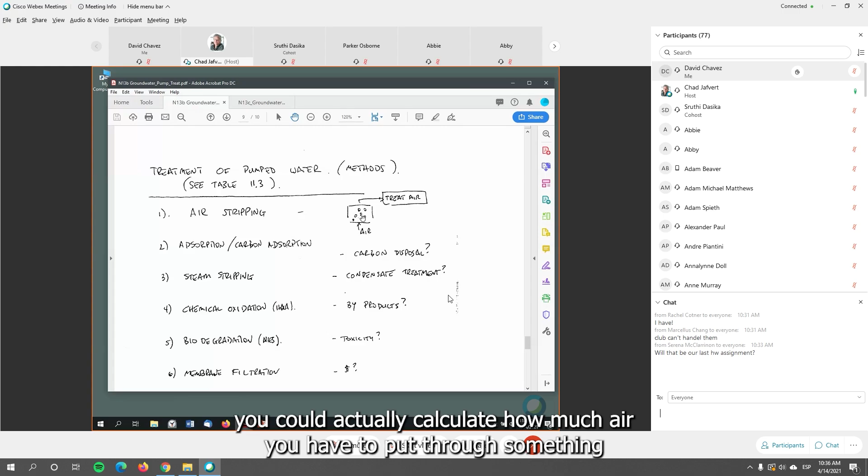So air stripping is one way. We've talked about Henry's law, so you know - if I'm putting air through water, those air bubbles are saturated with the chemical in the water by the time the bubble gets to the top and breaks. You could calculate how much air you have to put through to basically strip out all the contaminants, assuming equilibrium partitioning to the gas bubble by the time it reaches the surface. The finer the gas bubble, the more distribution to the bubble, or the more saturated the bubble will be, because it's a surface area to volume phenomena.

So air stripping, you can actually air strip in the vadose zone. Oftentimes I think down here we have something - well, no, I don't.

You can put a sparging tube down in the unsaturated zone and basically blow the contaminants out, then capture them as they're coming out of the surface. Capturing them as they're coming out is problematic, but you can also pump the other way, pumping it out through the pipe and treating it at the end of the pipe.

Adsorption, carbon adsorption. There are actually a lot of places that do this. They use activated carbon as an adsorbent. Activated carbon has a high surface area. Chemicals adsorb to it, and you usually model it with a simple Freundlich isotherm.

If you've got a water plume contaminated with some contaminants and you don't have a whole lot of other organic matter in the water, you can adsorb those contaminants, and then you have to deal with the activated carbon disposal. You can take it to an incinerator and burn it, or you could potentially wash off the carbon and reuse it.

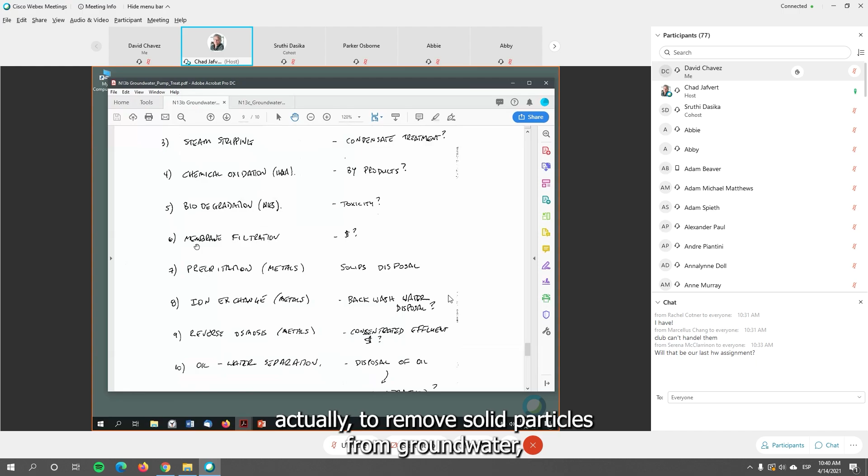Membrane filtration. This is often used to remove solid particles from groundwater, because even in the subsurface you've got lots of fine particles, and those fine particles, colloids, have a lot of contaminants on them.

So before you dispose of the water, which could be low in contamination, you remove the fine particles by membrane filtration, and it basically cuts down on the amount of contamination that's in the water. Then you may be able to discharge the water to the sanitary sewer and have the city treat the rest of the water.

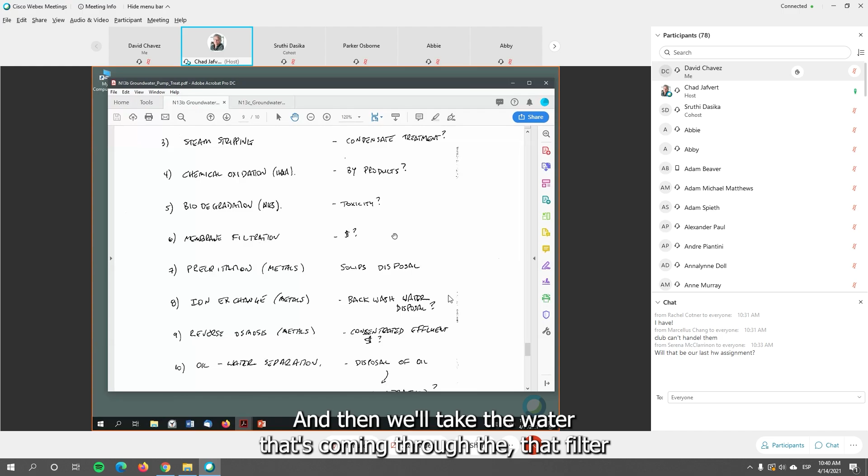Obviously you need a permit to do that, but you could. They may even say we don't want any particles, you have to remove the particles with a membrane filter, and then we'll take the water that's coming through that filter into the sanitary sewer.

Precipitation, sometimes you can do this with metals. Sometimes you can put in a cutoff wall that will precipitate heavy metals. So if you have a plume of contamination containing some metals like copper, cadmium, lead, or chromium, you may be able to put in a cutoff wall that contains a co-ion that can precipitate that out, or just absorb to it.

The common thing here is again putting in zero valent iron, because zero valent iron oxidizes slowly, and as it oxidizes, other metal species absorb to it.

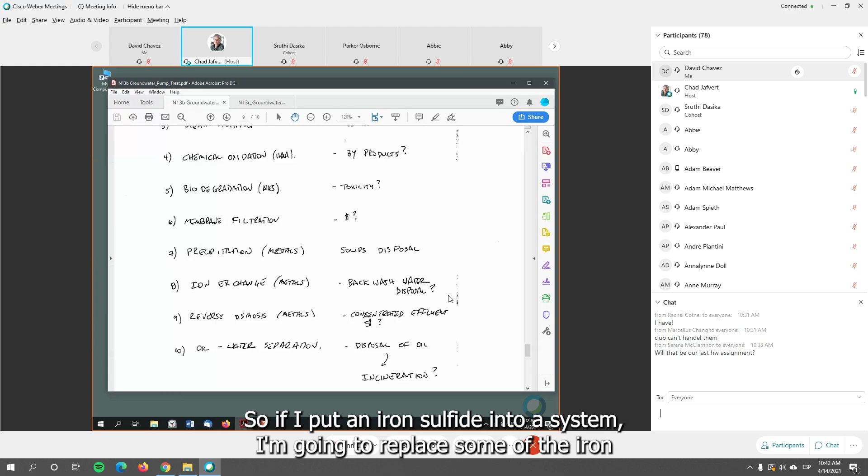Things like even sulfides, you can precipitate metals with sulfides now. Sulfides are very famous as ways of precipitating metals, because iron sulfide is not very soluble, but mercury sulfide and copper sulfide are even less soluble. So if I put iron sulfide into a system, I'm going to replace some of the iron with mercury, cadmium, copper, or other things, because they're less soluble than the iron.

Ion exchange, then you have water to dispose of. In 360, we do an ion exchange experiment where we put copper on an ion exchange resin and kick off the sodium ions. So you could do the same thing if you've got metals in a plume.

Maybe you've got chromium-3 in a plume. You could run it through an ion exchange resin, capture all of the chromium, exchange it with sodium, and then you have to deal with the backwash water, which is high in chromium. But then you may be able to precipitate that chromium out and reuse it, send it back to the factory where the chromium originated, and they can reprocess it.

Reverse osmosis is generally done to really clean up the water, so it's used in drinking water. It's rarely used in water contamination or groundwater contamination issues unless you're going to drink the water. Reverse osmosis removes the organics, it removes the metal species, it removes just about everything. The only thing it doesn't remove is the water.

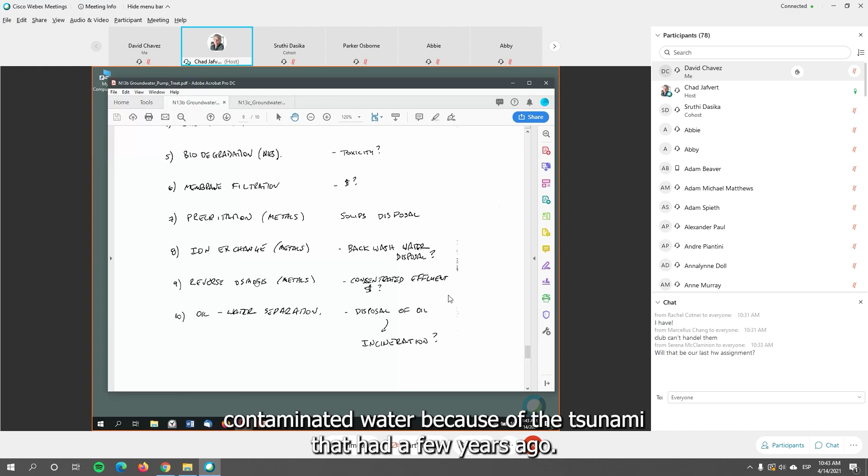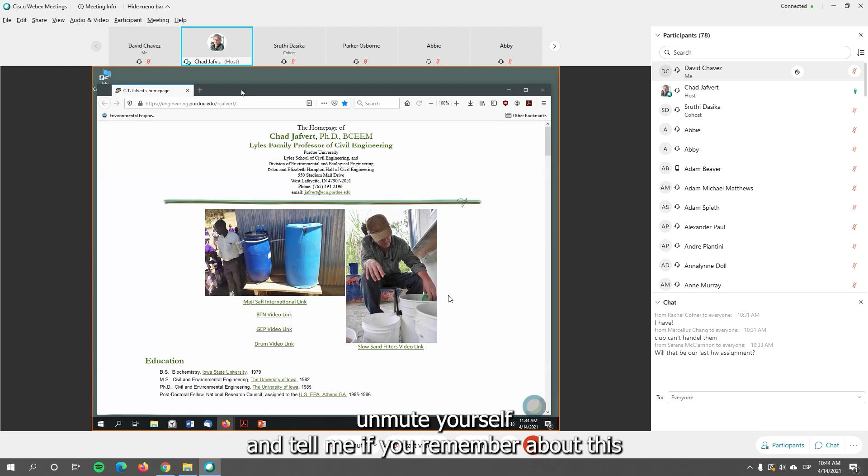On NPR today, they were talking about the nuclear reactor in Japan that has all of this contaminated water because of the tsunami that hit a few years ago. I don't know if you guys remember this. Unmute yourself and tell me if you remember about the tsunami.

I do. I can't spell tsunami.

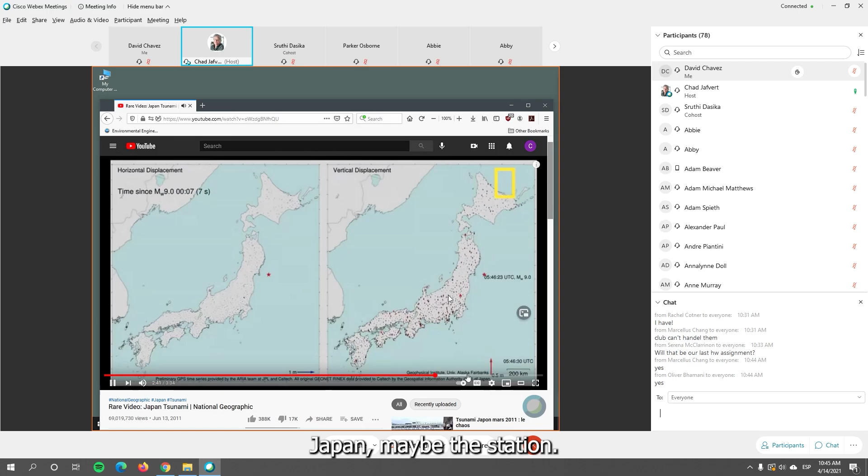Anyway, it knocked out a nuclear power plant that was right on the coast. And as a result, they have all of this contaminated water in tanks, and now they're dealing with it.

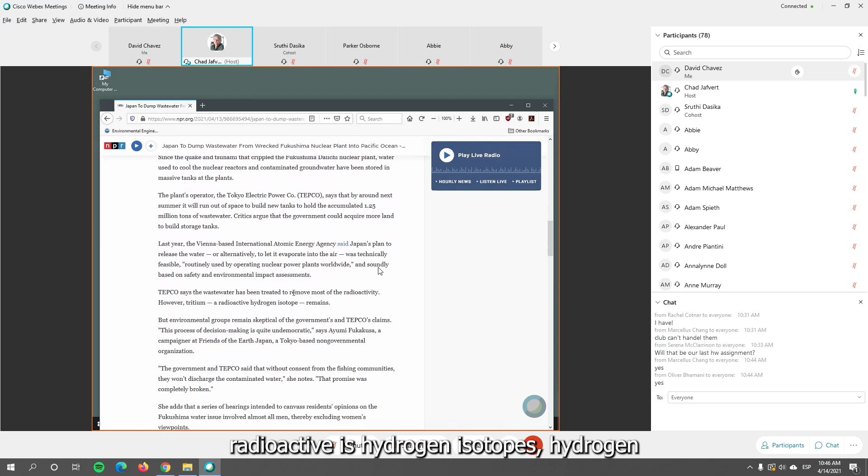Let me see if I can find it. Yep, this is it, NPR: Japan to dump wastewater from wrecked nuclear plant into the Pacific Ocean. There's a lot of protests going on about doing this, but they've treated the water apparently with something like reverse osmosis. They haven't said exactly, I don't think. But because a lot of the radioactive water is hydrogen isotopes, hydrogen is half part of water, H2O, and so if you get tritium contamination, obviously reverse osmosis isn't going to take out the tritium.

We've talked about two nuclear disasters. One isn't necessarily a disaster that happened immediately - it was something that happened over about a 40-year period in the state of Washington with the Hanford site and its contamination, which is hugely polluted. And then this nuclear treatment facility too, having to deal with water. So we're still not there on how we deal with energy.

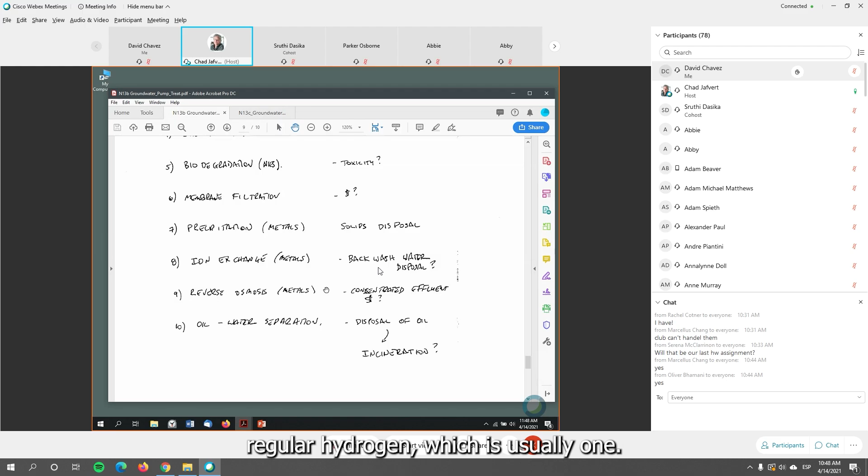But anyway, reverse osmosis can be used, and in that case, I think that's what they did use to remove the uranium and other things. But the problem still is the heavy water still gets through because it's moving through with the water, obviously. So they basically concentrated the really bad nuclear isotopes, but not the tritium. Tritium is basically a hydrogen atom with two additional neutrons in the nucleus, so it's got an atomic mass of 3 rather than regular hydrogen, which is usually 1.

And there is some - let me look up one other thing.

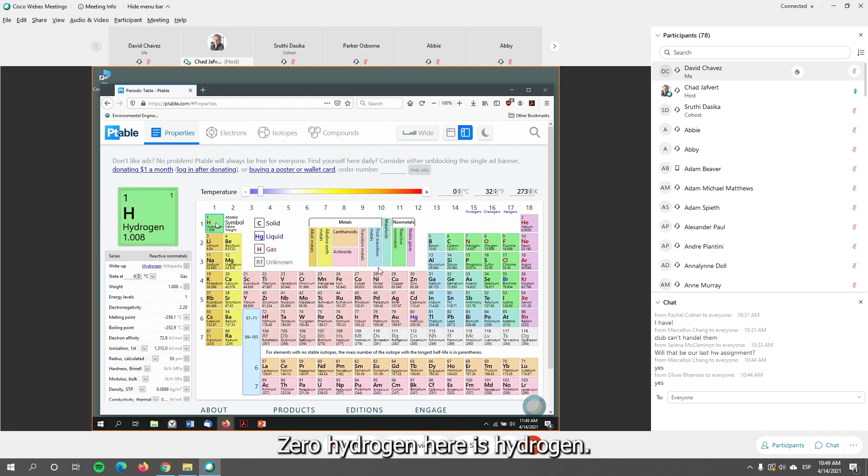I know I'm getting off track here. Hydrogen has an atomic mass of 1.008. Chlorine has an atomic mass of 35.45. Why is hydrogen not 1? Why is carbon 12.011? I thought they did carbon as 12. What's this 0.011?

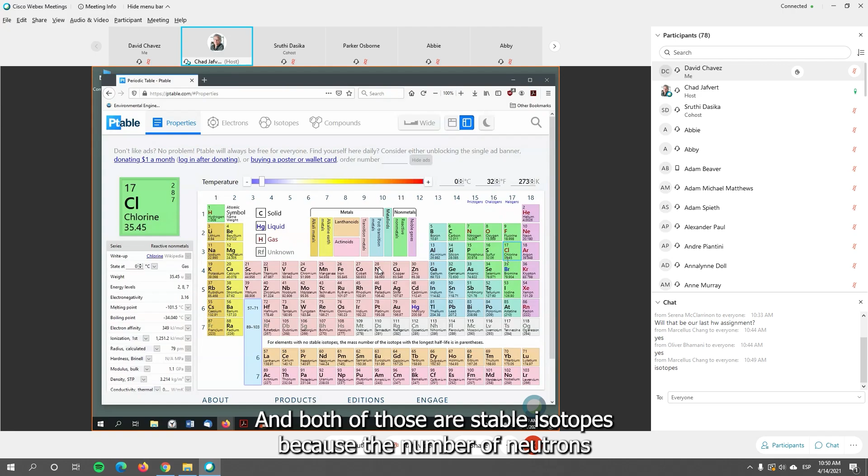It's interesting because chlorine is one of the few where it's almost halfway in between. There are 2 common isotopes of chlorine, one is 35, and I think the other is not 36, it's actually 37. Both of those are stable isotopes because of the number of neutrons in the nucleus.

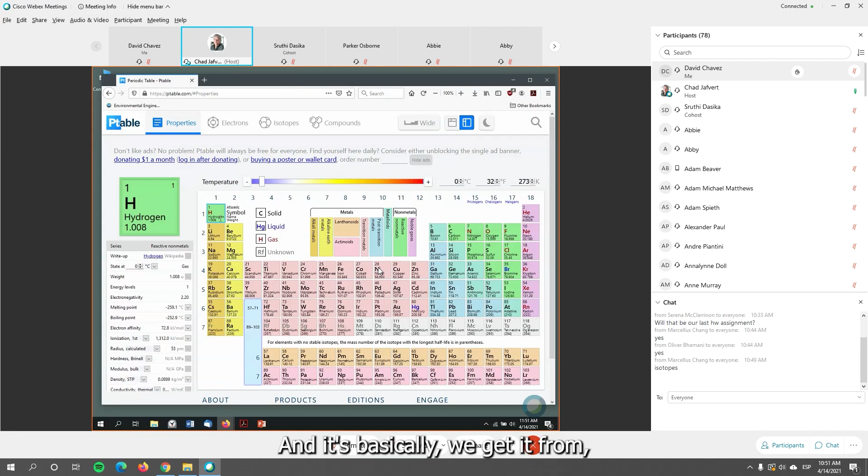So over here, hydrogen, there's a little bit of deuterium, which has a proton and a neutron in the nucleus. But tritium is very, very rare, and we basically get it from bombarding things with other atoms, and it also forms from the decomposition of uranium and other heavy radionuclides. So it's obviously a problem in nuclear waste.

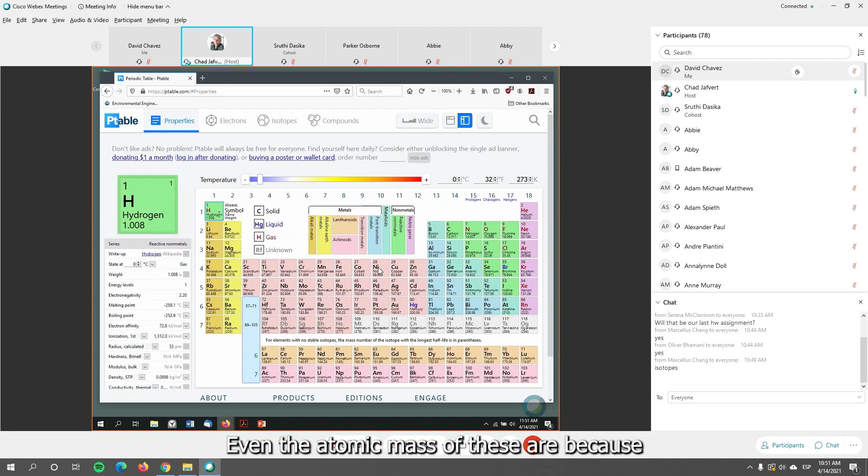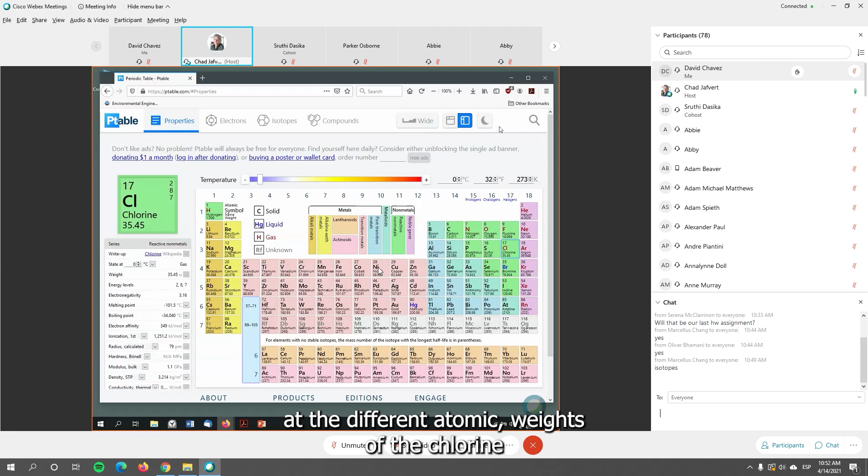So you get the idea, even the atomic mass of these elements is because of the different isotopes. But chlorine is the biggest problem. If any of you do mass spec analysis, chlorine containing compounds are really, really difficult to look at because of these different weights. A mass spec looks at the mass of the molecule, and if you have 2 or 3 chlorines, that means for the same compound you're going to have 5 or 6 peaks because they appear at the different atomic weights of the chlorine in the individual molecules. So mass spec is where you can really see that difference.

So ion exchange, reverse osmosis. We don't do a lab on reverse osmosis, but it's pretty straightforward. We've talked about it in this class, where you're basically pressurizing water, pushing it through a semi-porous membrane where the water goes through, but because of the properties of the membrane it does not allow ions to move through it.

So reverse osmosis is a good way of deionizing the water too. It also doesn't allow large macromolecules to go through, like humic acids, fulvic acids, so you remove all of the organic matter from the water. A few small organic molecules may get through, but not very many, like ethane or ethanol might come through. But it's mostly water, and the ions, just because the membrane is fairly hydrophobic, it doesn't allow ions to dissolve in the membrane like it does for water to dissolve in the membrane.

Then oil-water separation, this is one of the most common things, because if you have a groundwater that's contaminated with a non-aqueous phase liquid, a NAPL, it can be an L-NAPL or a D-NAPL, either a light non-aqueous phase liquid that floats on top of the water, or a D-NAPL, which sinks into the water and becomes very, very problematic. So oil can be heavy oil or light oil.

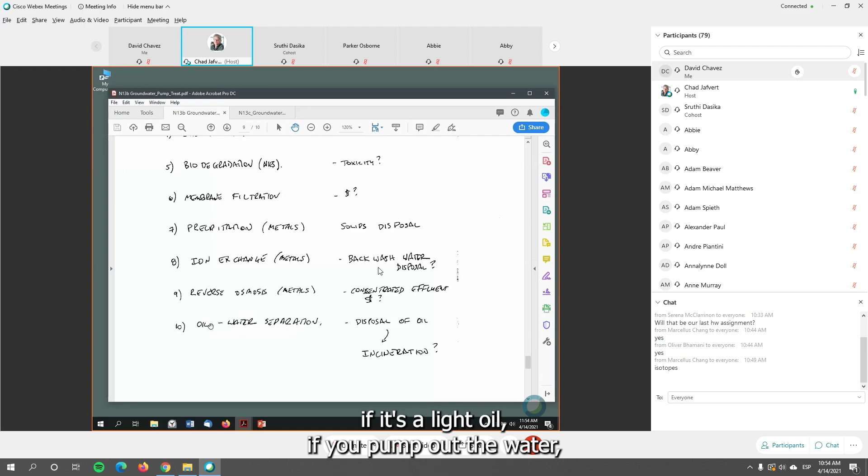But if it's a light oil, if you pump out the water, the first thing you do is put it in a big tank. The oil floats on top, and then you can skim that oil off and drain the tank from the bottom, and then with the permit, potentially dispose of that water through the sanitary sewer. That way you keep the oil, and then the oil may go to a hazardous waste landfill, or it may be incinerated, depending upon what kind of oil there is. So disposal of the oil is incineration or some other process.

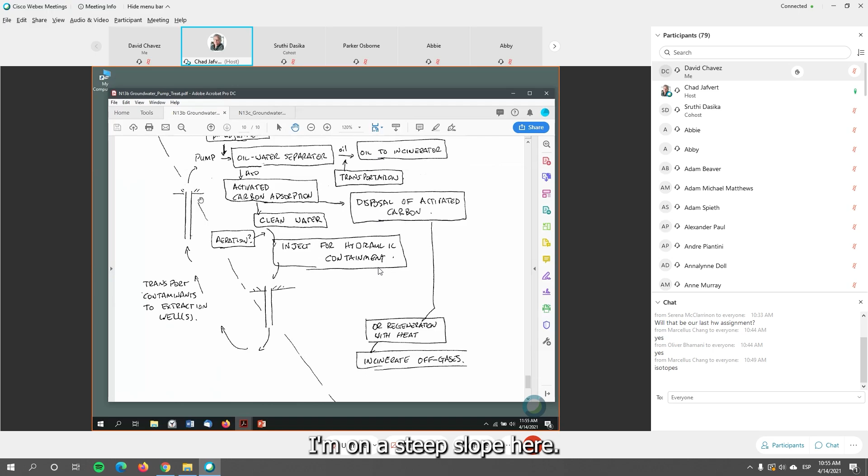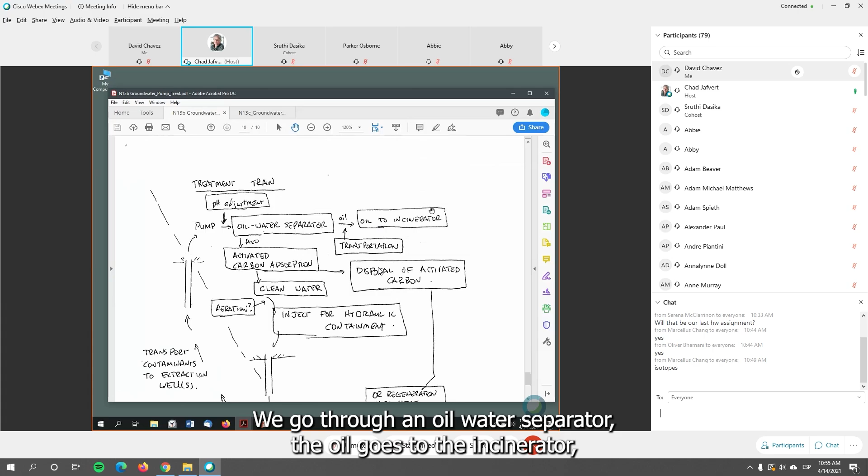So here's an example, transport of contaminants to extraction wells. This is below ground, this is above ground. I turned it sort of sideways so I'm on a steep slope here, but think of this as being a flat slope. We are pumping water out at this well, and then we may be doing pH adjustment. We go through an oil-water separator, the oil goes to the incinerator, and we have transportation costs to get it there.

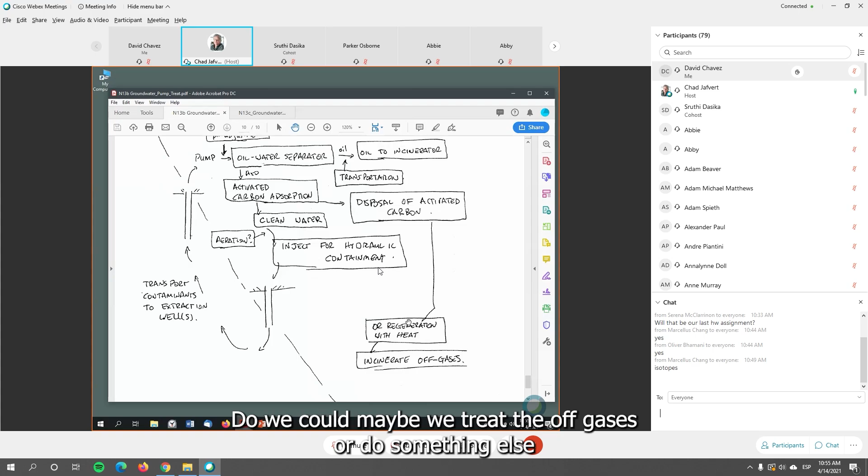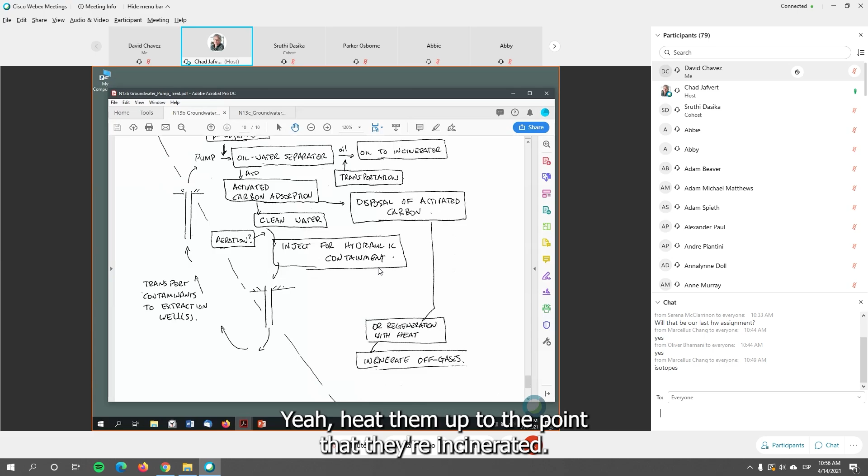The water then goes through an activated carbon adsorption unit to remove organics that are not removed by a separate phase process. Then we have fairly clean water, but the activated carbon we have to dispose of, or we can regenerate it with heat. So we could heat it up, and then the off gases we have to do something to, maybe we treat the off gases, or do something else to basically break down the organic chemicals, or even just heat them up to the point that they're incinerated, that they're basically all oxidized.

The clean water then we can re-inject for hydraulic containment. So we contain our plume of contaminants on site by re-injecting our clean water after we've cleaned it all up, and that pushes the contaminated water towards this pump, because we're increasing the groundwater table here and decreasing it here. We're adding water here and taking water away here, so the water flows from this point to this point.

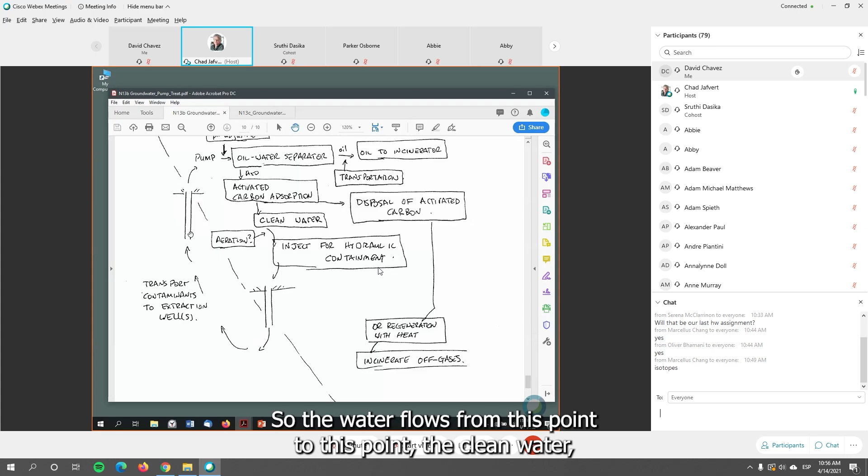The clean water could also go through aeration or other processes, but you get the idea. As environmental engineers, we deal with systems. We don't just pump the water - it's not just one system we're dealing with. We're always doing multiple things. Each of these is a separate process, and we're linking processes together in a treatment train.

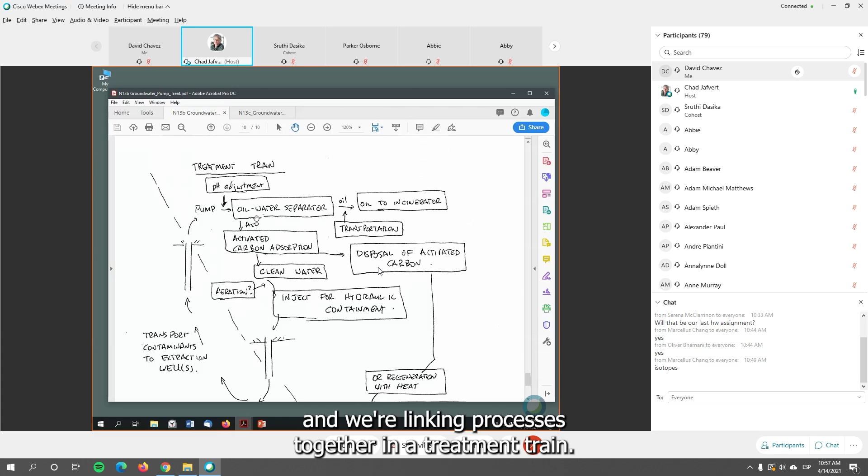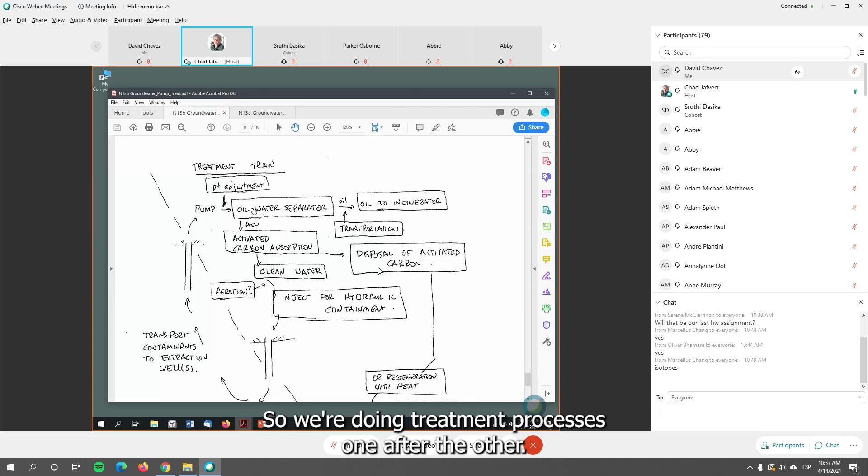So the water is first treated here to remove the major contamination. Then we're removing more contamination here. Then the clean water may be aerated again to induce some microorganisms before we re-inject it. We're doing treatment processes one after the other, and how we sequence these is very important. We don't want to send our water through carbon adsorption first, because then all the oil is going to get stuck to our carbon and we're going to have a real mess.

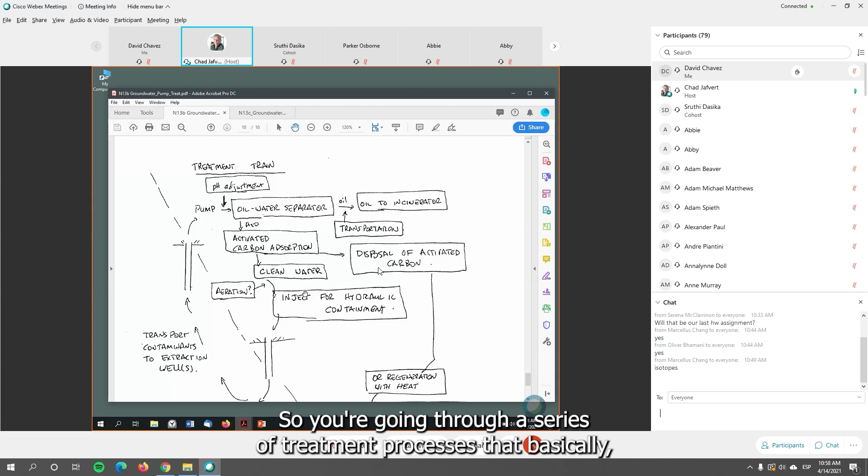So the sequence of treatment technologies is really important. If you take a wastewater treatment course, it's the same way: you go through an initial water clarifier to settle out solids, then the water goes to an activated sludge plant to remove the dissolved organic material by biologically consuming that material into biomass, into microorganisms, and then you settle out the microorganisms and end up with clean water. So you're going through a series of treatment processes to end up with clean water in the end.

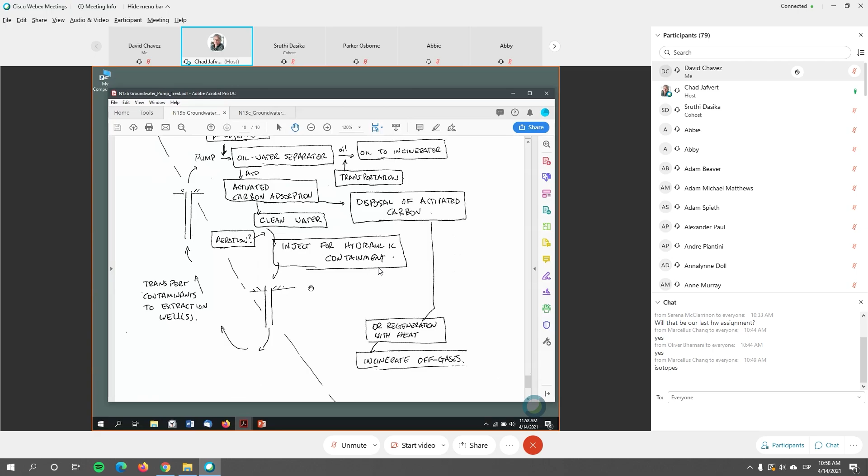And you have to do it in series, and each of those processes has to work efficiently. So you're designing a whole system to treat things, and there are costs associated with each of these.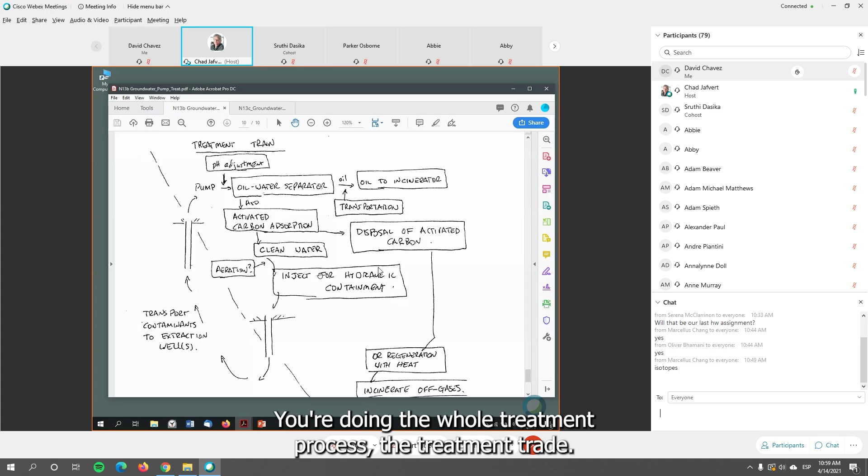Just like you guys take a life cycle analysis course - life cycle is sort of the same thing, only now you're looking at a product that you make, and how do you break it down, where does it go? It gets used, and then how do you break it down? Part of it goes here, part goes here, part goes here. You've got a whole stream of processes to treat all those different materials, whether it's a car with plastic, tires, metal, oil and other things. You're doing a whole treatment process, a treatment train.

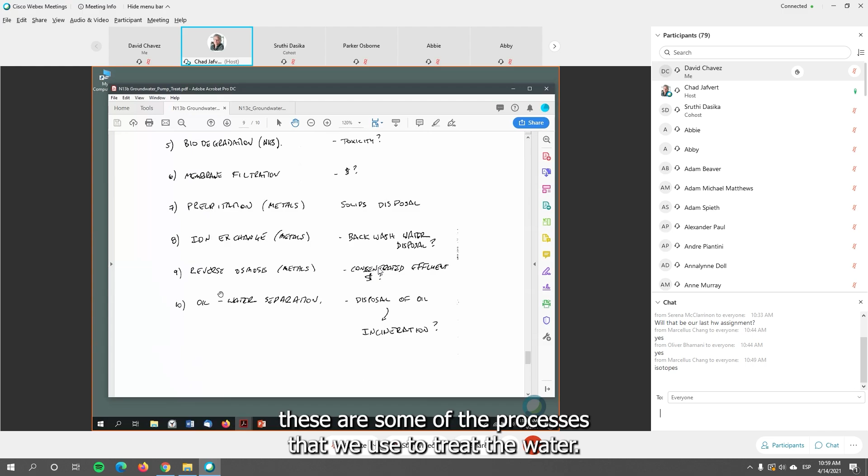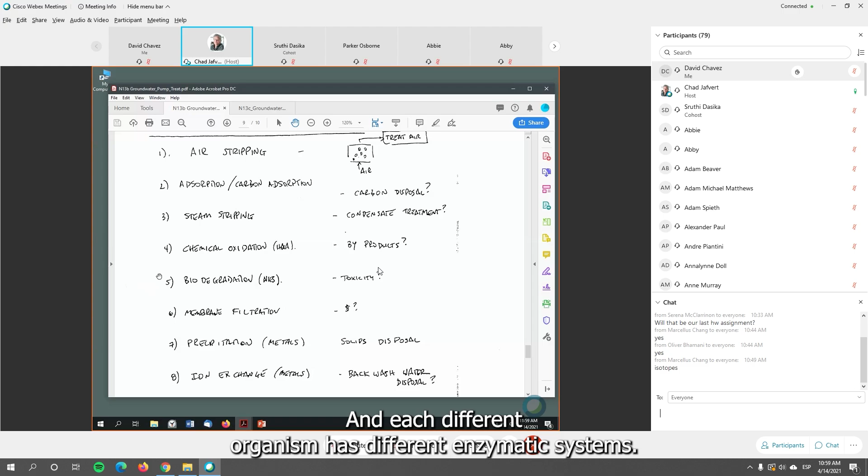So that's the end of these slides, but for water, these are some of the processes we use to treat the water. Some of these are big processes like biodegradation. Each different organism has different enzymatic systems, and some compounds can be broken down easily while others cannot. These are old notes - Nies used to work a lot on biodegradation. Right now George Zhao is doing most of the biological work.

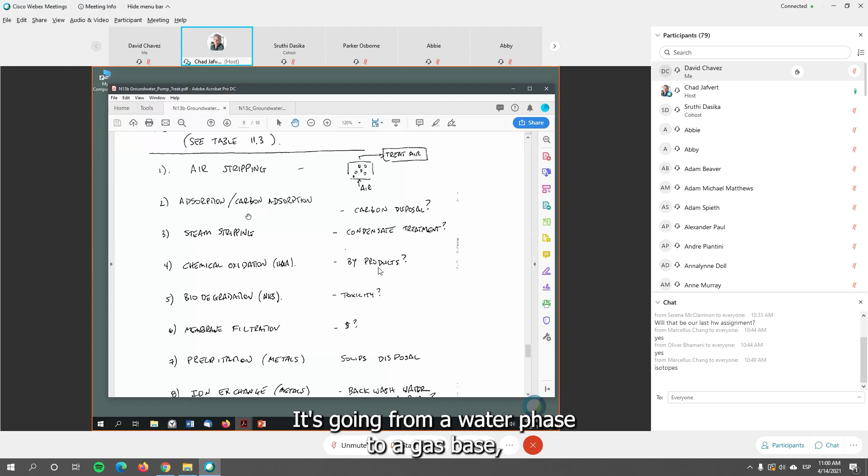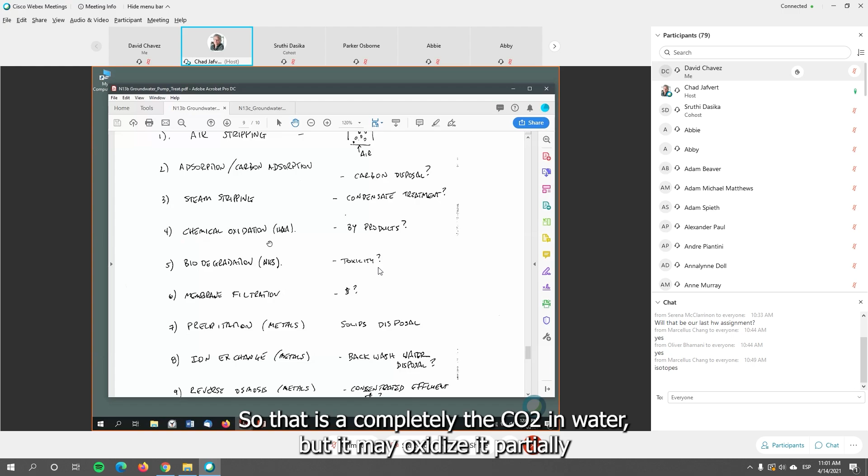Whereas these processes are mineralizing the compounds generally. Chemical oxidation may not oxidize it completely to CO2 and water, but it may oxidize it partially so microorganisms can start chewing it up and mineralizing it completely. Membrane filtration is a phase separation process, but it's not really phase separation - it's just concentration, because everything stays on one side of the membrane or the other. It stays in the water phase, but you're concentrating it.

Then precipitation is a chemical process - it's a phase transfer process in a way, because the ions are going from the water phase, dissolved in water, to becoming a solid precipitate, a salt. When you precipitate out metals, you're forming a salt - an iron sulfide, or calcium carbonate, or whatever that salt is.

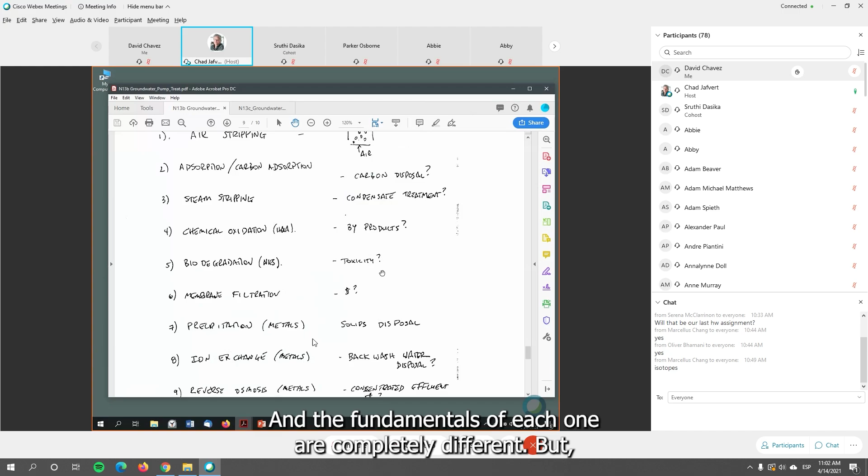Solid phase. This is a phase transfer because it's going from the aqueous phase onto the solid phase. So you guys get the idea. We have different processes, and they don't all look alike, and the fundamentals of each one are completely different.

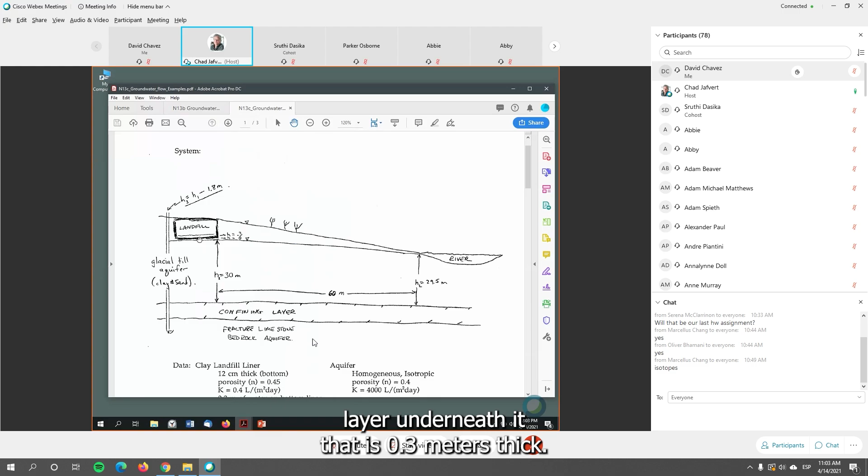But to treat groundwater or surface water, those are the kinds of things you do. Here's our landfill, here's our river. This landfill has a clay layer underneath it that's 0.3 meters thick, so it's a thin layer. Our landfill, of course, we sited right above the water table, right? We didn't put it in the water table. So here's our aquifer. This is a glacial till aquifer.

In Indiana, we have lots of glacial till. If you look at Indiana, let me see if I can dig up a map. I'll just use Google Maps. Why not, right? I don't need a fancy map. Here's Indiana, and let's do the satellite view.

Look at this. What happened here? Why is this so flat? Anybody know? Why is northern Indiana so flat while southern Indiana is not? Because the glaciers flattened it out, and by the time it got to southern Indiana, it was melting out and turning into glacial outwash.

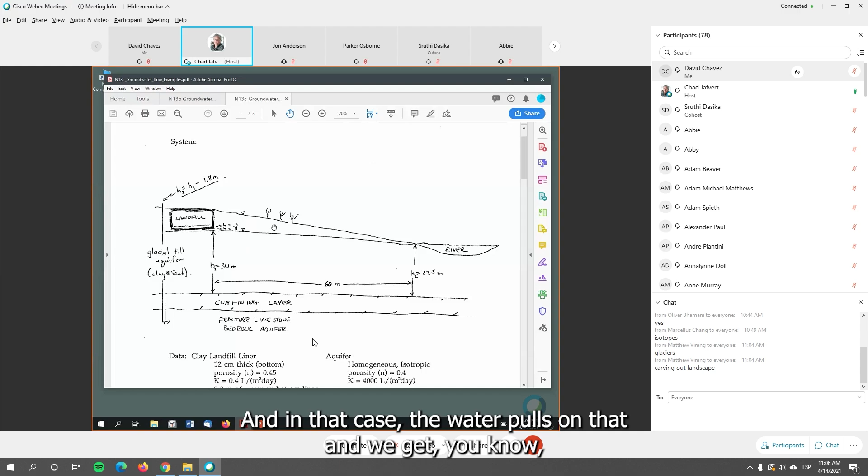Sometimes this clay comes all the way up, and we don't have glacial till under everything. The topsoil is basically right on top of the clay, and in that case the water pools on this, and we don't get good runoff because we don't have glacial till for the water to move through. But this is called glacial till because it got deposited during the last glacier period.

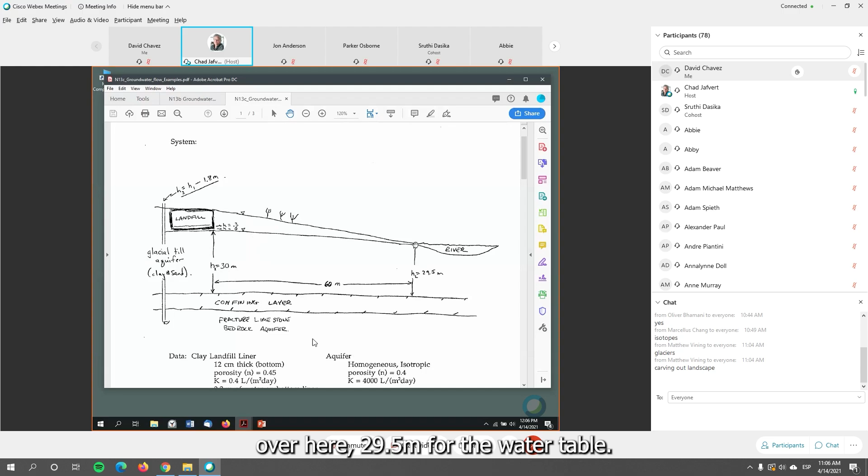The height here, I'm just saying 30 meters. Over here, 29.5 meters for the water table height. This is relative to sea level, even though I'm assuming this is completely flat. But this 30 and this 29.5 is relative to the same point in elevation. 60 meters from this point to this point.

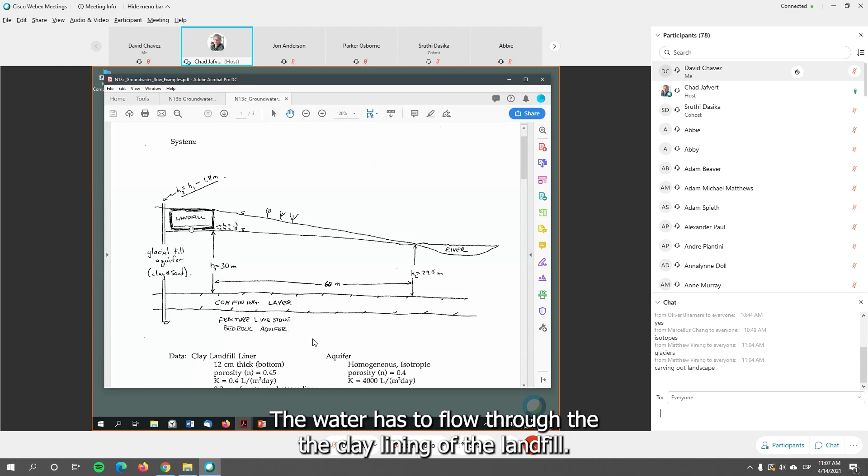So we've got two places for the water to flow. The water has to flow through the clay lining of the landfill. It hits the water table, and then it's flowing in the groundwater to the river. So we've got two things impeding a contaminant in the landfill from reaching this river: the clay layer underneath, and then the flow of the groundwater in the glacial till aquifer.

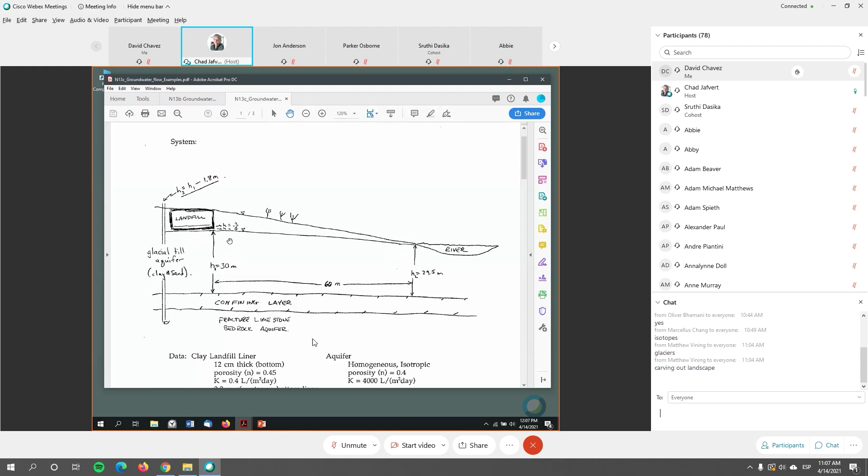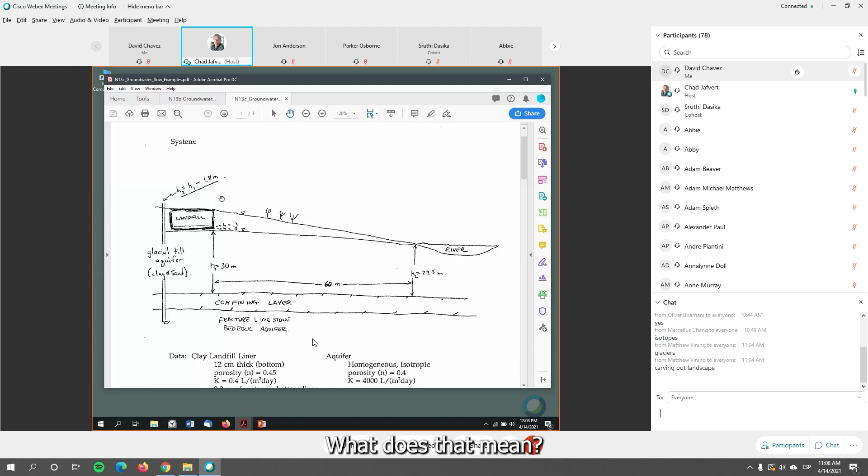This little symbol here indicates a water level, this is a soil level, and our landfill is here. We put a well in here, and H3 is equal to H1 minus 1.8. I don't even know what that means. What does that mean? But the height there is 0.3 and 0.1. So I think this means what? I'm not sure, we'll figure it out.

So what is the vertical velocity of water through the clay seal? How long will it take the water to percolate through the clay? And then how long will it take the leachate water to reach the river once it has broken through the clay? And what is the vertical component of the velocity vector? How long will it take to reach the bedrock? In other words, the water is still actually going down here.

Oh, that's what I did. H3 is equal to H1 minus 1.8. That means that this level—we've got water going in here. Is that right?

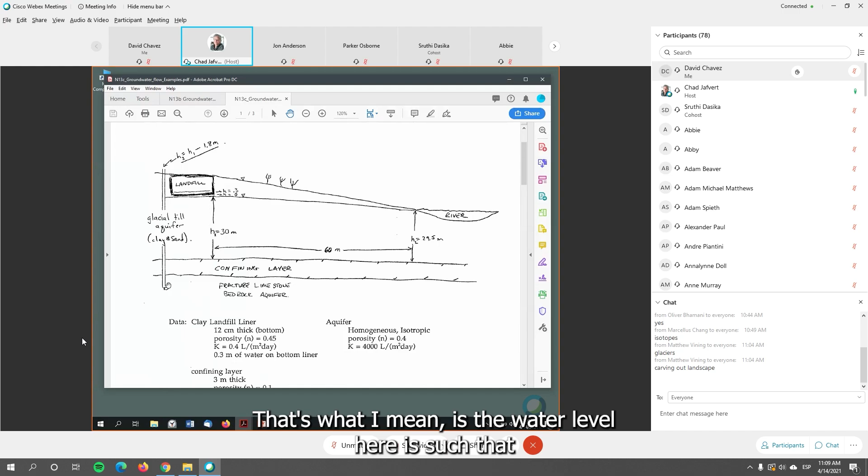What is the vertical component of the velocity vector? How long will it take to reach the bedrock aquifer? You have water flowing in this direction too. The water level here is such that this is a confining layer, but you also have some water flowing through here. But that means we need to know the thickness of this layer.

Our confining layer is 3 meters thick. I give you a porosity and a hydraulic conductivity. So you can calculate, knowing that this is 30 meters and the difference between H1 and H3 is 1.8 meters, the water pressure across there.

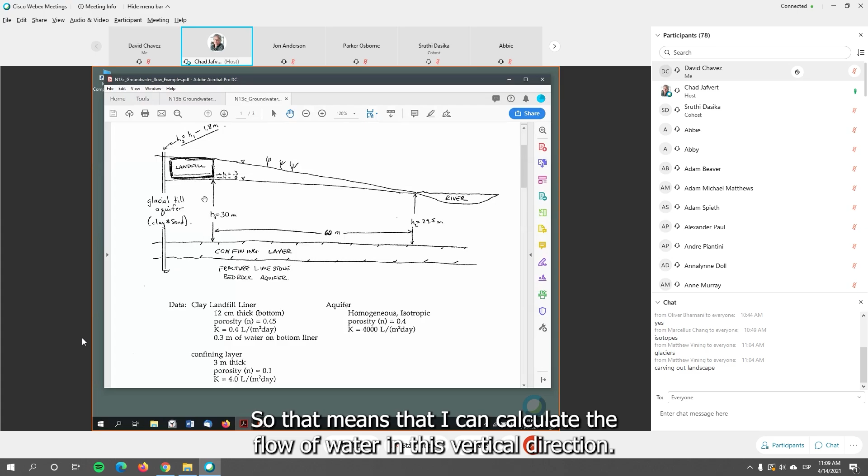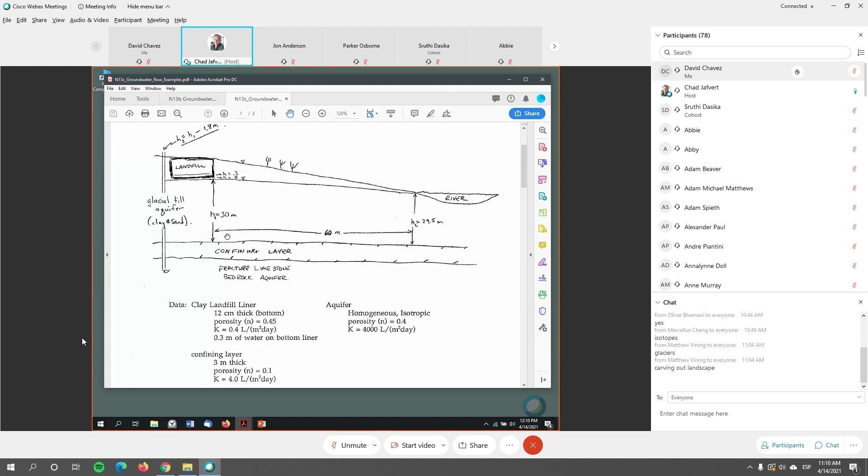So that means I can calculate the flow of water in this vertical direction. I can also calculate, because I know the difference in height there and there, the water flow in this direction. So in actuality, once the water hits the water table right here, it's flowing with a vector this way, mostly vertical, but because there is some flow through this confining layer, it's flowing down, which is why I have this slope here too.

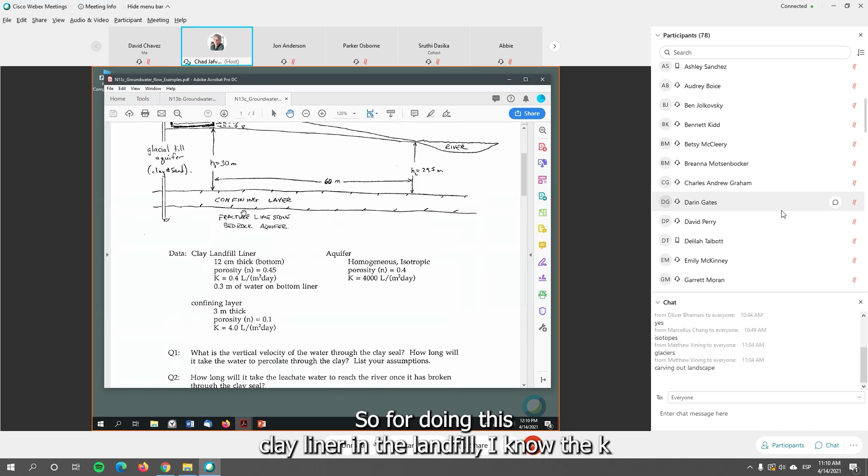To go through these calculations and answer the questions, just use Darcy's law. I know what K is, so for this clay liner in the landfill, the hydraulic conductivity is 0.4 liters per meter squared per day.

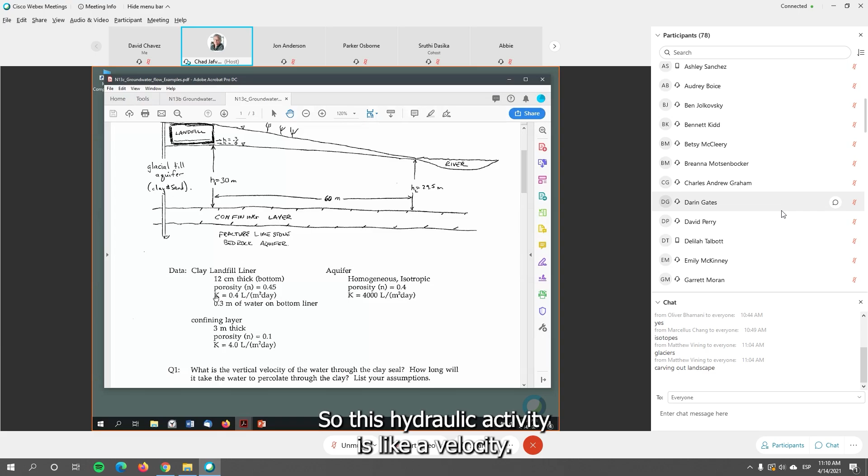Again, I could calculate this as a velocity because liters can be converted to cubic meters. Cubic meters per square meter gives me meters, so that's meters per day. This hydraulic conductivity is like a velocity in a way, but I can also write it in units of cubic length per squared length per time. So I just use these values.

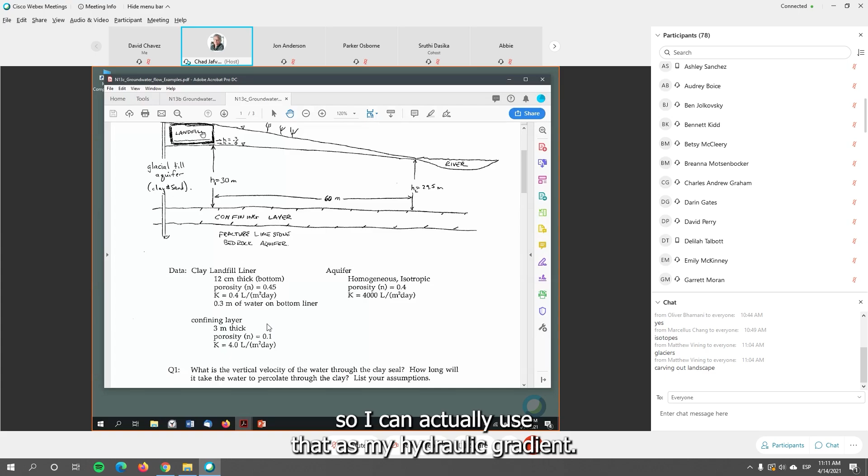I know it's 12 centimeters thick, and there's 0.3 meters at the bottom of the liner, so I can use that as my hydraulic gradient: 0.3 over 0.12. This is my delta H over delta L. Conversion factor times hydraulic conductivity gives me that many meters per day.

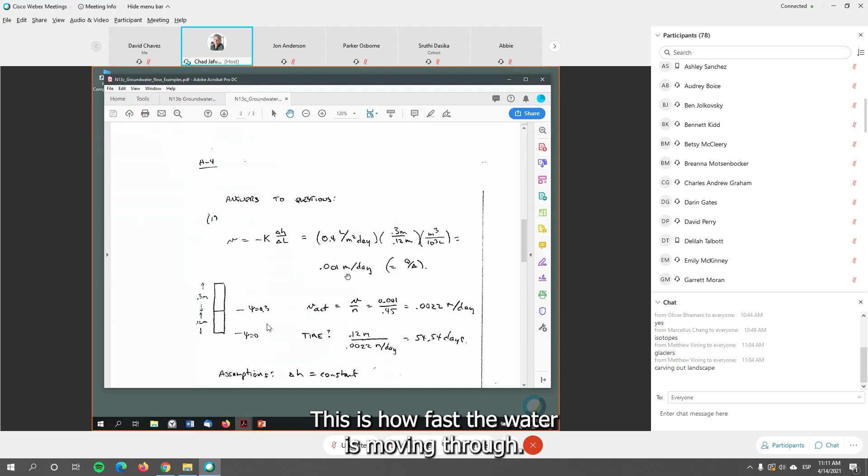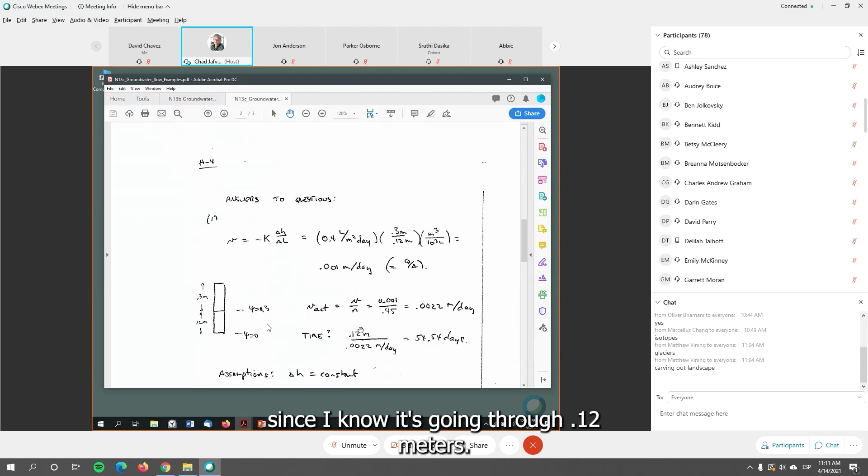This is how fast the water is moving through my clay layer, but this is the specific discharge. To calculate the actual velocity, I have to divide by n. Since it's going through 0.12 meters, that's the thickness of my layer here, most of these problems are just about the units.

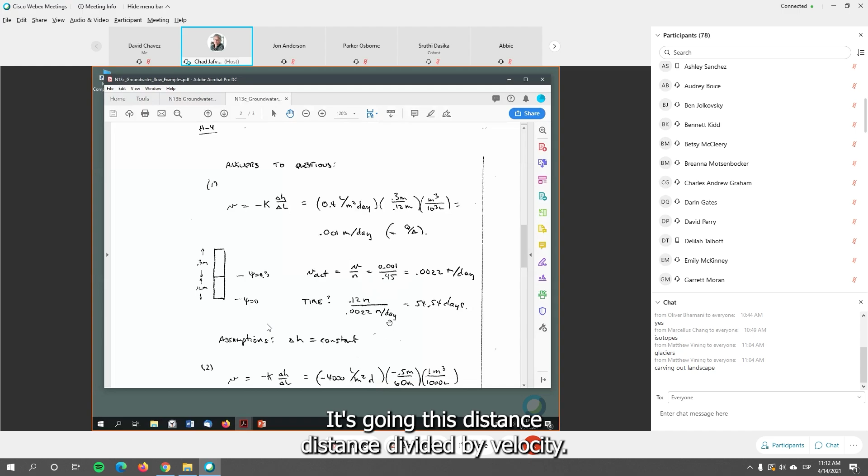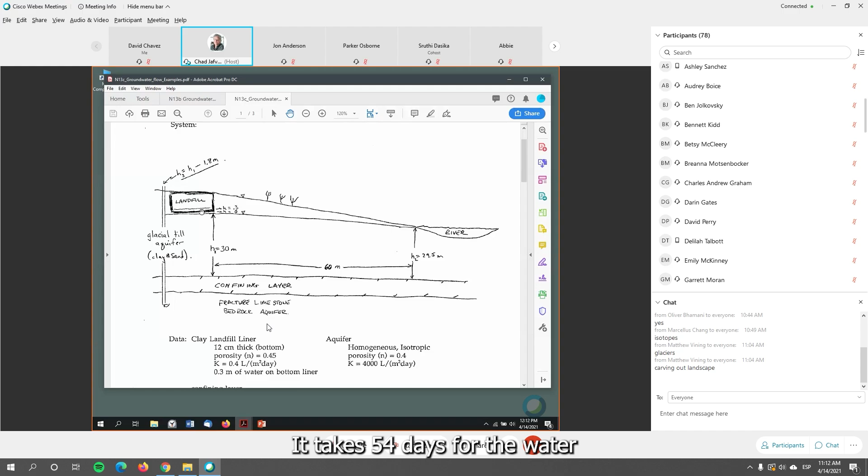This is the velocity, going this distance. Distance divided by velocity gives me time. It takes 54 days for the water right at the top of the clay to reach the bottom of my clay layer. There's a little bit of vadose zone here, but basically from that point on it's in this aquifer. So it takes 54 days to go through my short clay layer.

Assumption: I'm assuming that delta H is constant, so as it's going through, the water is being replaced on top.

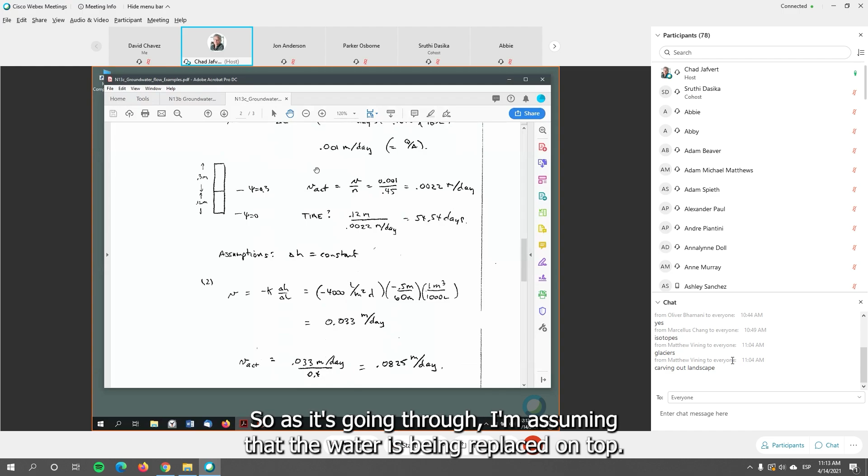Then for the second part, I do the same thing, only now with this: I have 30 meters of head here, 29.5 meters of head here, going over 60 meters of distance. I know what my K value is here, much higher because now I'm in an aquifer. My hydraulic conductivity in clay is really, really low compared to sand and gravel.

My sand and gravel aquifer conductivity is huge, 4,000. So it's minus 4,000 times my delta H, which is 0.5 over 60, that's my difference in height, and 60 meters is my distance, my delta L. Unit conversion again gives me my specific discharge.

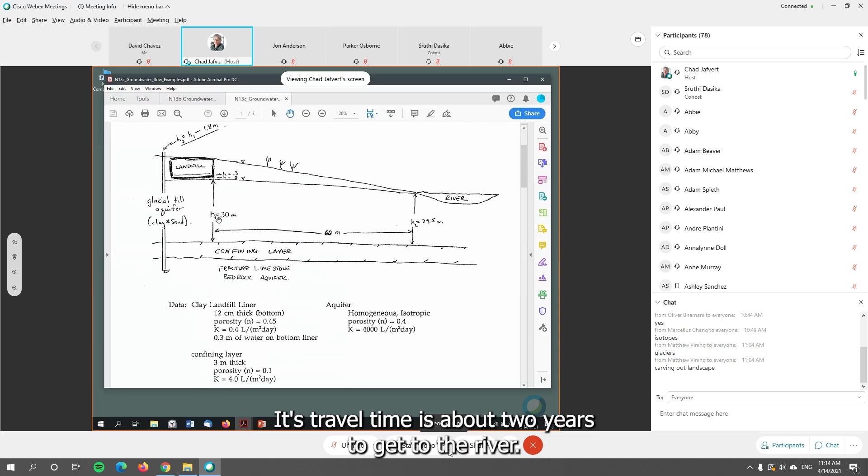My actual velocity is this, and that means it takes about 2 years to reach the river. So 54 days, but 2 years — it's kind of amazing, but that's because this is a long distance. Travel time is about 2 years to get to the river. So it comes through in 54 days, then 2 years to reach the river.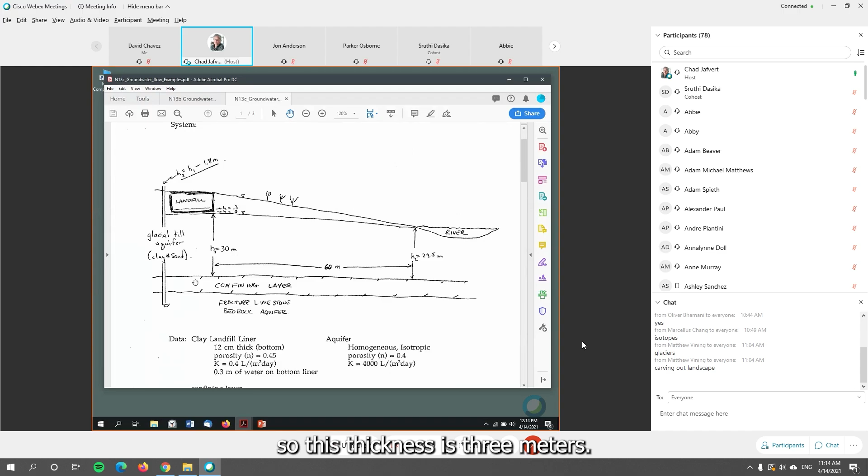My delta H is 0.8. My delta L is 3 meters, so this thickness is 3 meters. My delta H between the bottom here and the top is 1.8 meters. So I'm telling you that it's 1.8.

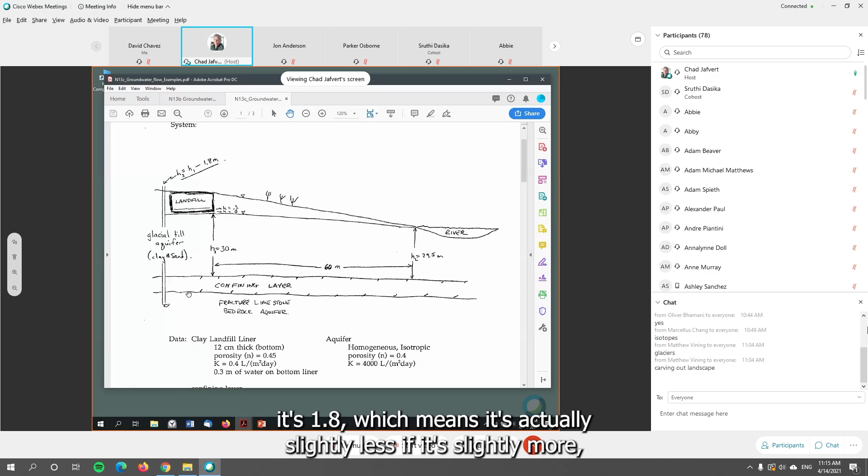The pressure difference at this point and this point - the pressure difference here is actually this 30 meters, but at this layer below it, it's 1.8, which means it's actually slightly less. If it was slightly more, the water would actually be flowing up. If this was an artesian well, in other words, and my pressure was up here, my water would be seeping up through here and then running to the river.

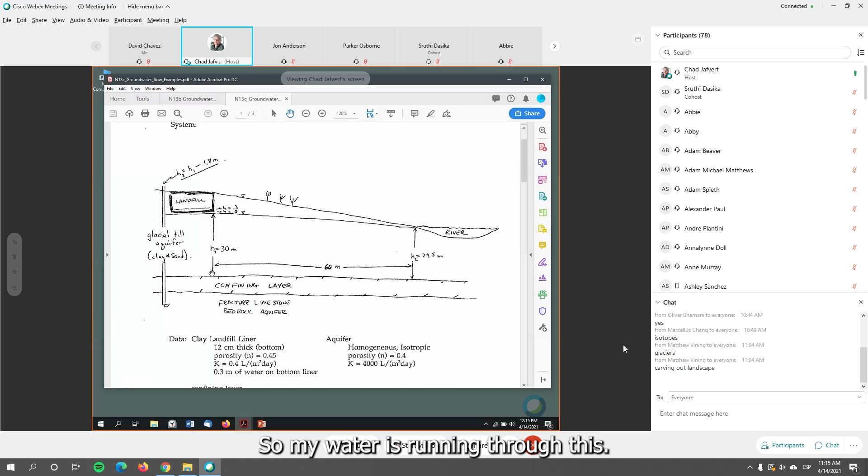But I've got a lower pressure down here than up here, so I'm not experiencing all 30 meters of pressure down here. It's actually lower, so my water is running through this. So if I go through the same calculation here...

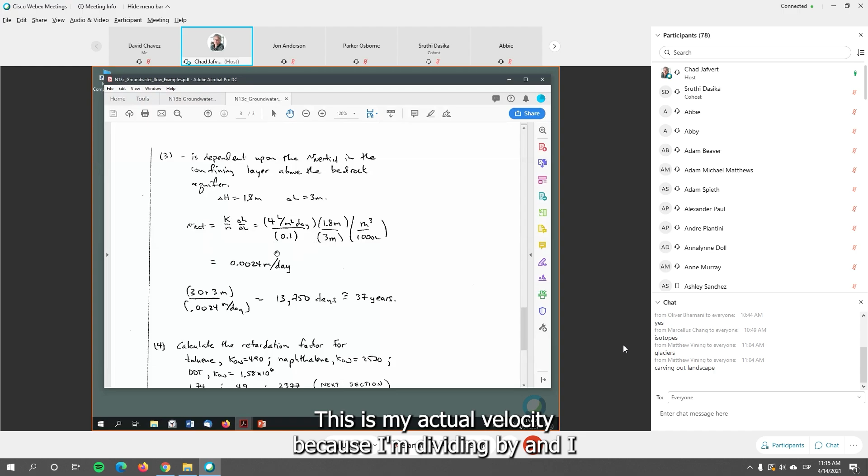And now I put in my n so that I can calculate my actual velocity directly. This is my actual velocity because I'm dividing by n. I could come up with 13,750 days, or 37 years.

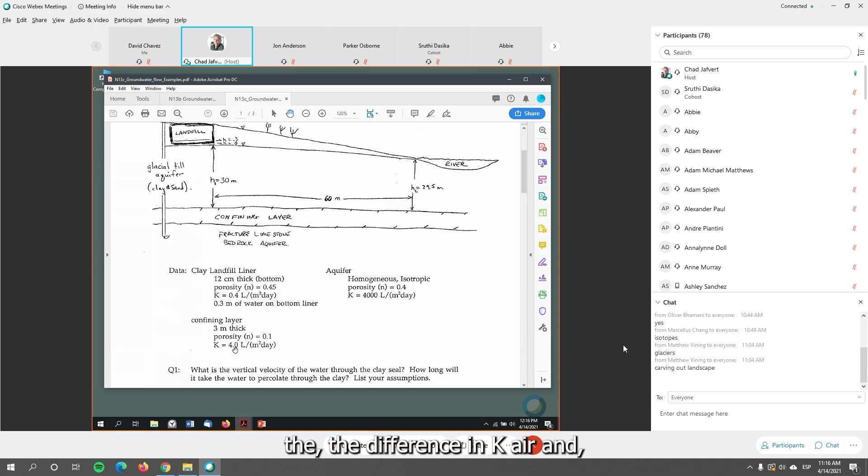And that's because this is such a huge confining layer. I've got 3 meters rather than 0.3 meters of clay. And in this case, actually this is lower than this. I've given this a little bit higher value, but it's got a lot longer distance to travel through because of the K and the difference in K here, and the difference in distance.

3 meters versus 0.3 meters - or no, this one's only 12 centimeters, whereas this one's 3 meters. Okay, you guys get the idea. Just plug and chug is the answer. This is the actual velocity.

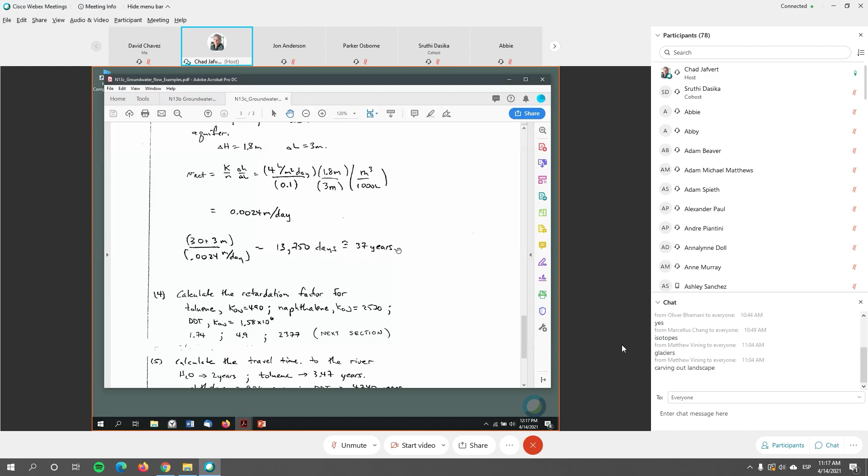Then I've got 30 meters plus 3 over this. That tells me I'm adding the 3 because I've got 30 meters. So I'm calculating how long it takes to go through it, but not calculating it from this point to this point like I did in my clay layer. I'm actually calculating it from this point up here - it's got to go 30 meters plus another 3 meters. So that's part of the calculation because it's moving very, very slowly through here.

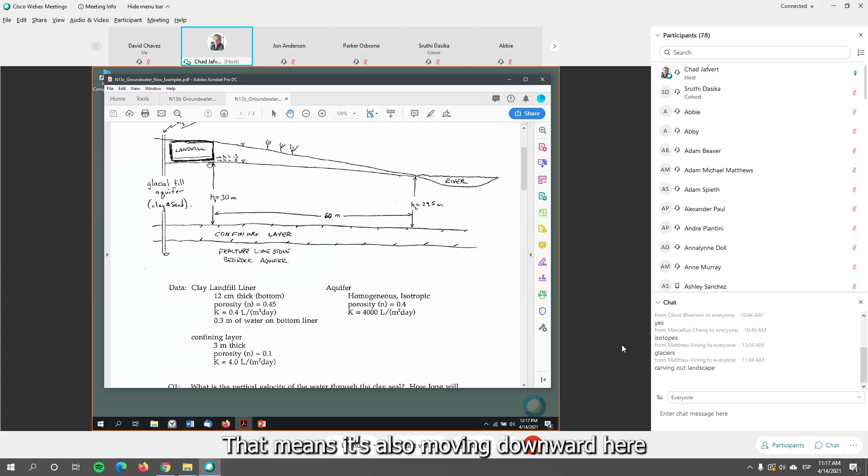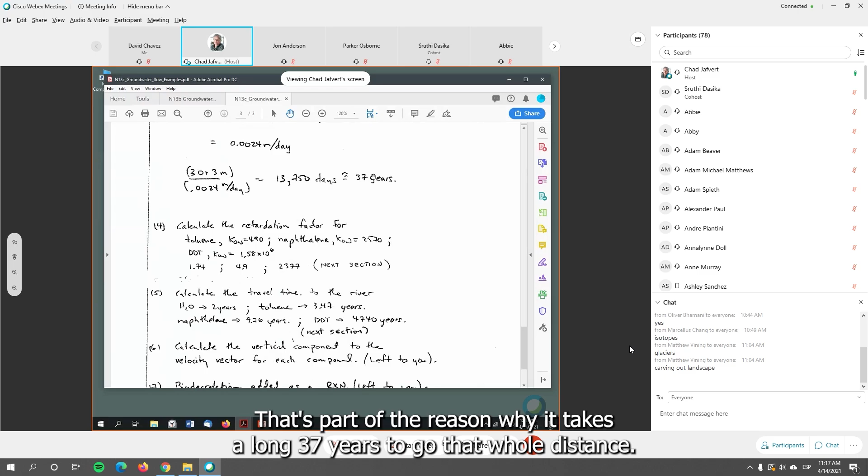That means it's also moving downward here at the same rate, very, very slowly. So I'm calculating the whole distance from this 30 meters plus this 3 meters. That's part of the reason why it takes so long - 37 years - to go that whole distance.

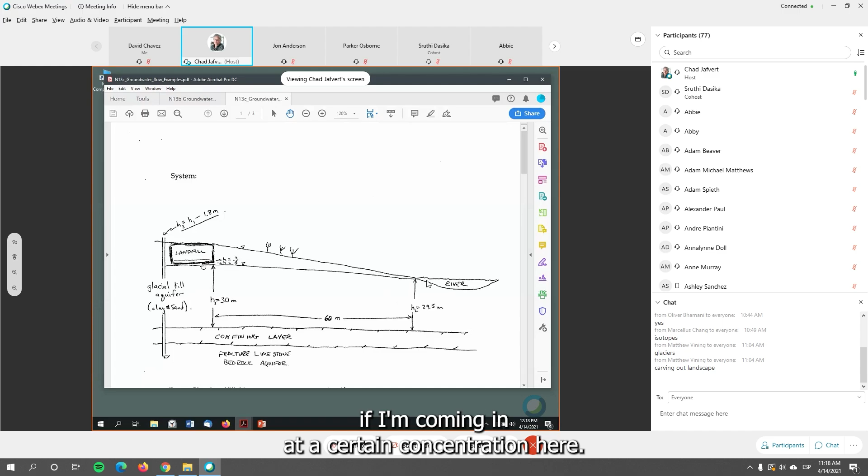You guys get the idea. You could do the same thing and add biodegradation as a reaction to this. Because if I had biodegradation, I could actually calculate - if I know the travel time from here to here, and I know the first order decay constant - how much of my chemical, if I'm coming in at a certain concentration here, well, what's my concentration coming out here?

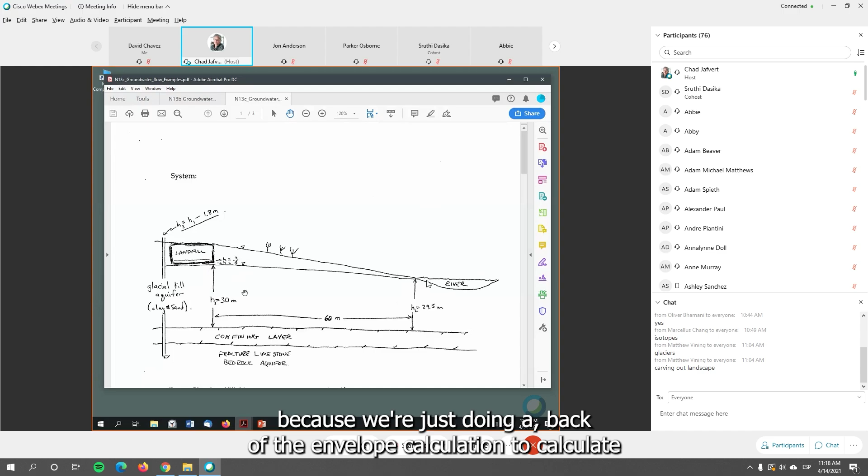Because I know the time it takes to get from here to here, assuming this is like a plug flow system, right? And we've talked about plug flow systems, you know what those are - you just assume that you don't have dispersion occurring. And in this case, it would be a reasonable assumption because we're just doing a back of the envelope calculation to calculate what would be my concentration coming out at this point if my chemical is moving in this direction.

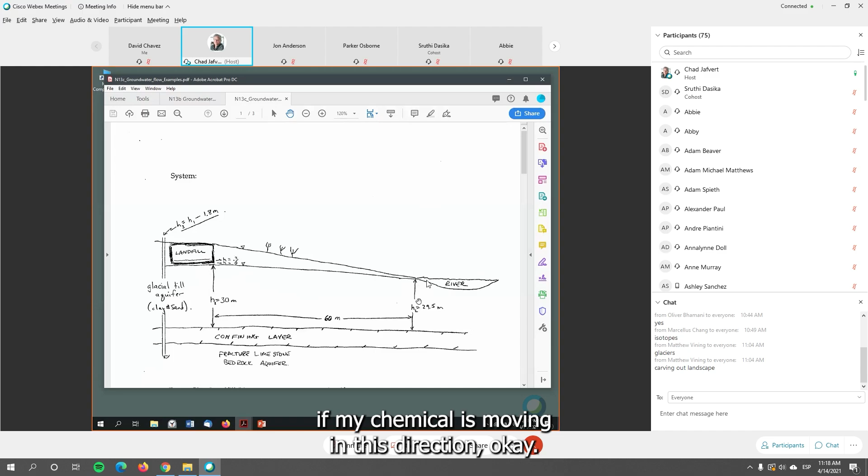Any questions? I think I'll leave this up if you want to unmute yourself and ask me any questions.

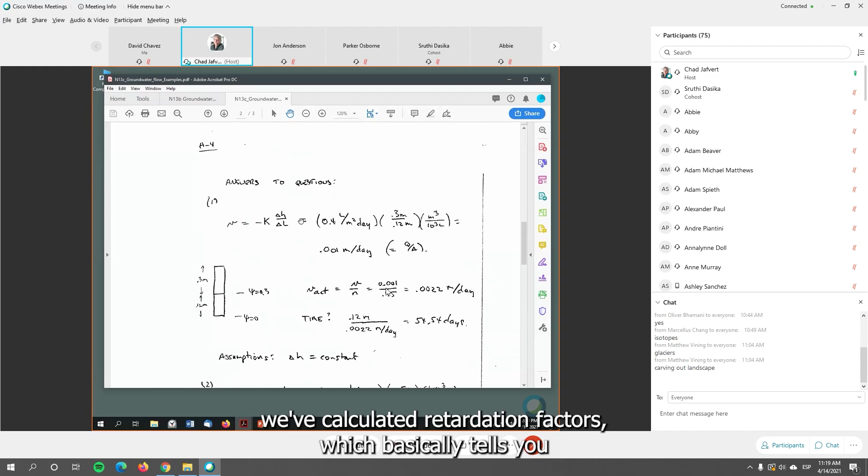I will give you some problems similar to this to do, because basically we've done two things here: we've used Darcy's law, but on top of that we've also calculated retardation factors, which basically tells you how fast the chemical is moving relative to the water. So I'll give you some Darcy's law problems and also some retardation calculation problems to look at.